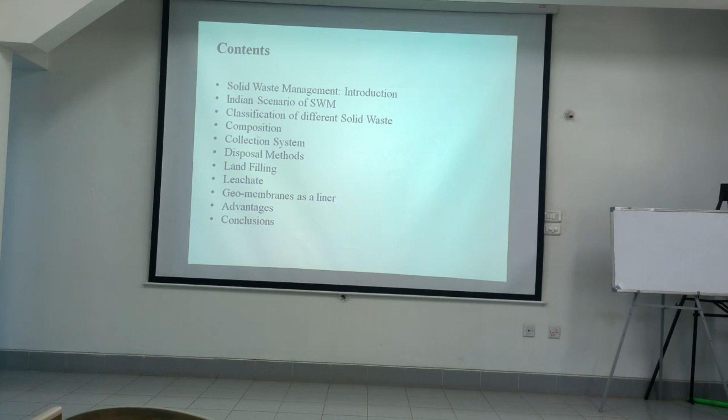So these are the contents of my presentation. A brief introduction about solid waste management and the Indian scenario of the solid waste management system. Then a little bit of detail: the classifications, the composition, the collection system, the present collection system, and the disposal methods, landfilling, leachate, geomembranes as a liner, and some of the advantages.

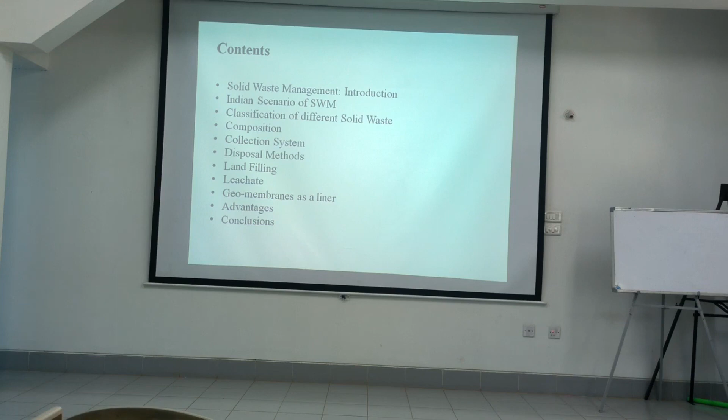Now let's see, the management of handling the solid waste is nothing but solid waste management. This is the discipline associated with the control of generation, storage, collection, transfer, transport, processing and disposal of solid waste in a specific manner, that is, an engineered manner in accordance with the best principles of public health, economics, engineering, conservation, aesthetics and other environmental considerations.

So it's not an easy topic where you can say it is a very simple method to collect door to door and throw it away from the city. We also think that the disposed waste should not harm the environment. So that is one point. Because of this, I am saying that safe disposal is a very specific manner to dispose the solid waste.

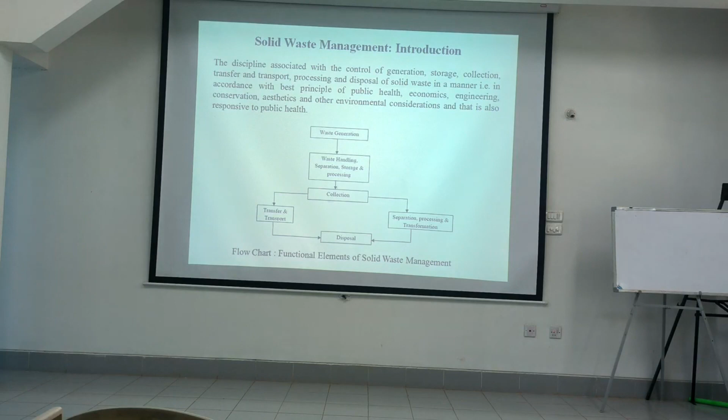So below there is a flow chart, the functional elements of solid waste management. Of course, what I told in the definition itself is represented in a flow chart. There is waste generation, normally from municipalities, households, commercial areas, institutions like that. Later there is waste handling and separation. I said that there is biodegradable waste, non-biodegradable waste like that. There is a need of separation, storage and processing. So this all comes in the second step.

Next it is collection. Then there are two: transfer and transport. Next, separation, processing and transformation. And the last point is disposal.

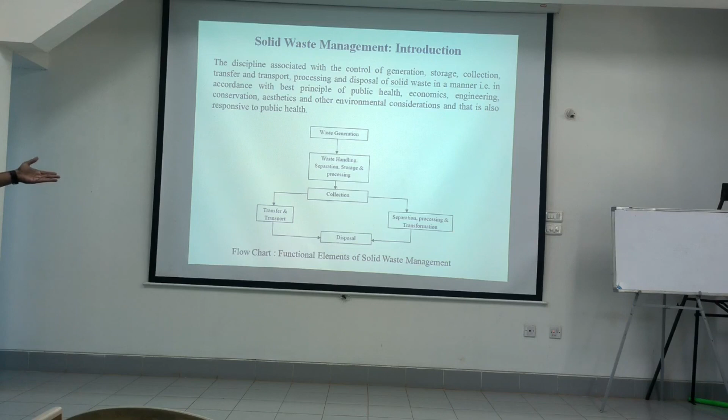I would like to share the present Indian scenario. There is a report from the Energy and Resources Institute that India generates over 62 million tons of waste in a year. So in 365 days the quantity of solid waste generated is around 62 million tons. Out of this, 43 million tons will be collected, 12 million tons are treated before disposal and the remaining 31 million tons are simply discarded in waste yards. So we are focusing on these 31 million tons, how it affects the environment, how it damages natural resources like soil, water, etc.

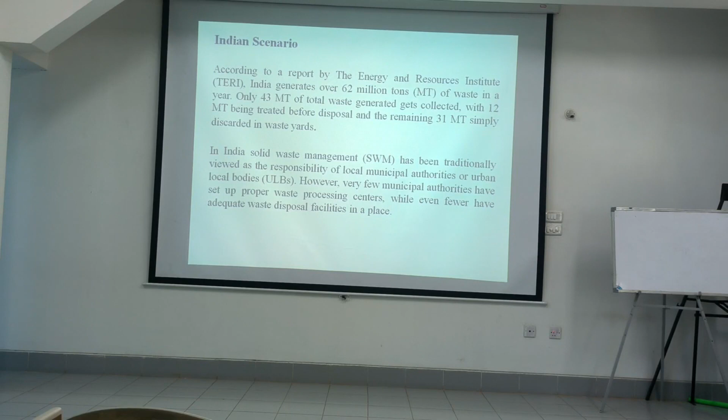In India, solid waste management has been traditionally viewed as, of course it is a responsibility of every citizen, but it is treated as a responsibility of the local municipal authorities or urban local bodies. However, very few municipal authorities have set up proper waste processing centers, while even fewer have adequate waste disposal facilities in place.

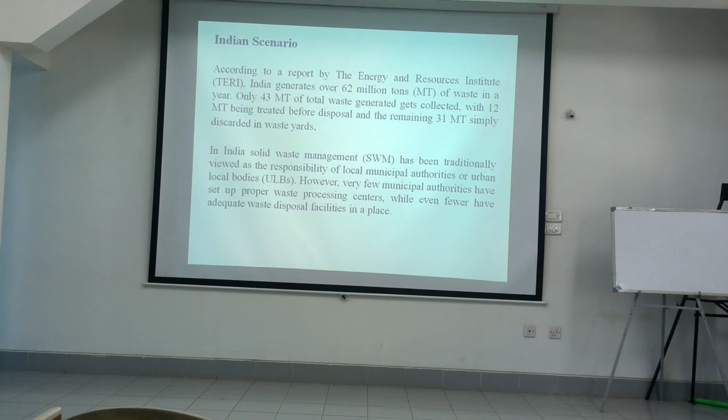We have already seen, in the early morning, motor vehicles will come and visit your home so that they collect the solid waste door to door. We are already observing this from local urban bodies to metropolitan cities. So this is how the solid waste management topic is considered in India. Next point.

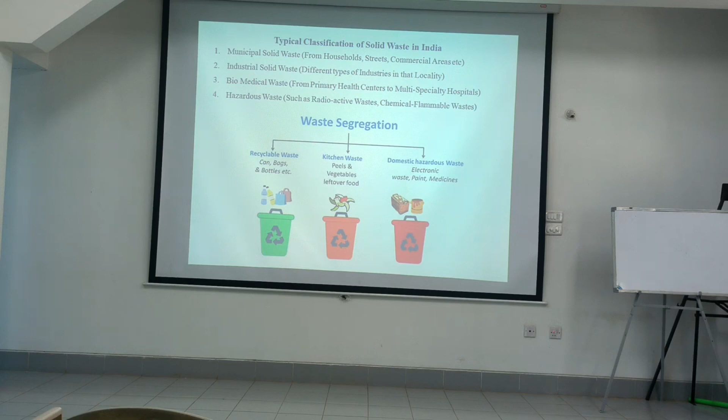So this is the classification. The entire solid waste, which is called garbage, will be classified as municipal solid waste. The sources are households, streets, commercial areas, etc. The second one is industrial solid waste. This definitely depends upon the type of industries in that locality, and some towns will not have any industries at all, where the industrial waste will be zero.

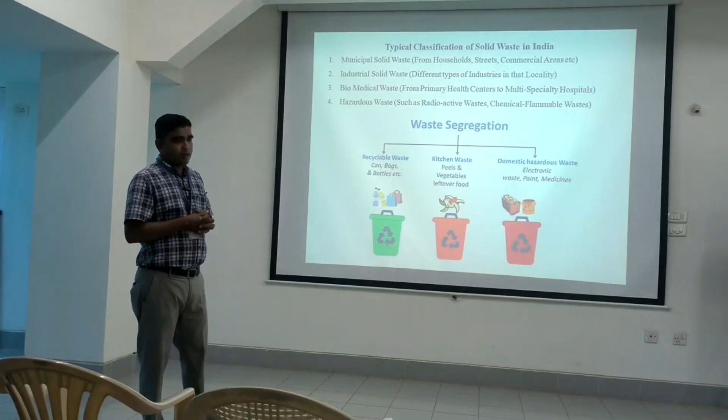The third one is biomedical waste. We know that it is generated from hospitals, from primary health centers to multi-specialty hospitals. Next, hazardous waste such as radioactive waste, chemical and flammable wastes. So these are the main components in the classification of solid waste.

So this is a small picture of how the segregation of solid waste is done at the source itself. It's a very simple task when it is done at the source itself, because later it's a very hard task to segregate all the waste when it is collected from the entire town.

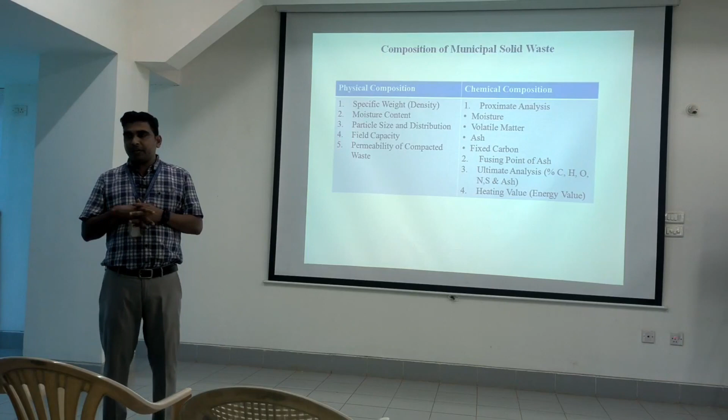So this is a little bit on the composition section. When you have collected the solid waste, there is a necessity to understand its physical and chemical composition, so that you can decide which disposal method is suitable for the collected waste. So here, the physical properties: specific weight, moisture content, particle size distribution, field capacity, permeability of compacted waste.

So these are the physical parameters, so that you can calculate the volume required, the vehicle requirement, and the area of the dumping yard. These are the parameters which help you to identify the equipment or requirements of a disposal method. So next is chemical composition.

In chemical composition, you have proximate analysis like moisture content, volatile matter, ash, fixed carbon content. Next, fusing point of ash, and ultimate analysis: the percentage of carbon, hydrogen, oxygen, nitrogen, sulfur, etc. These are some chemicals that may be found in the collected solid waste. Of course, the last one is energy value. The combustible organic matter can be converted into energy, so we can find out the energy of that solid waste in joules or kilojoules.

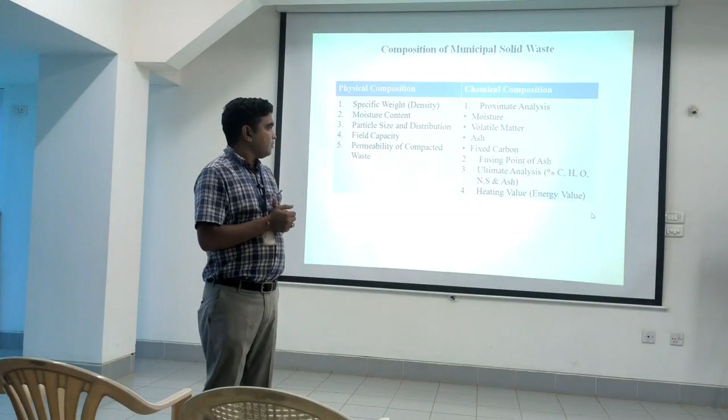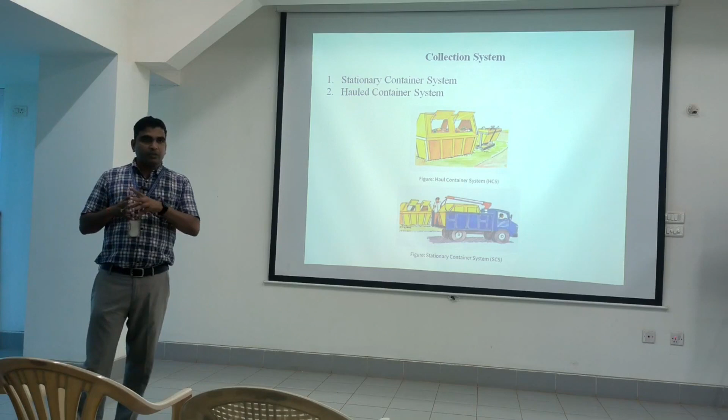In one method, the containers will be at the station itself. The name itself indicates that in the stationary container system the containers stay at a fixed position, and the collected solid waste will be transferred to the truck hauling equipment. In the hauled container system, the entire container will be lifted onto the truck and carried to a dumping yard. So there is a small difference, so that the environment will not get disturbed using the two methods. Each method has its own advantages and disadvantages.

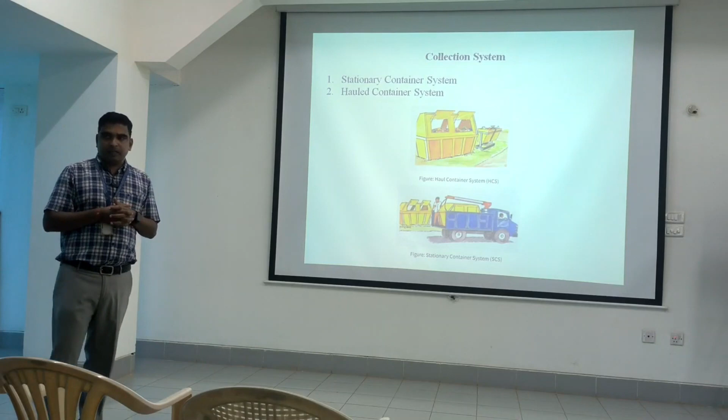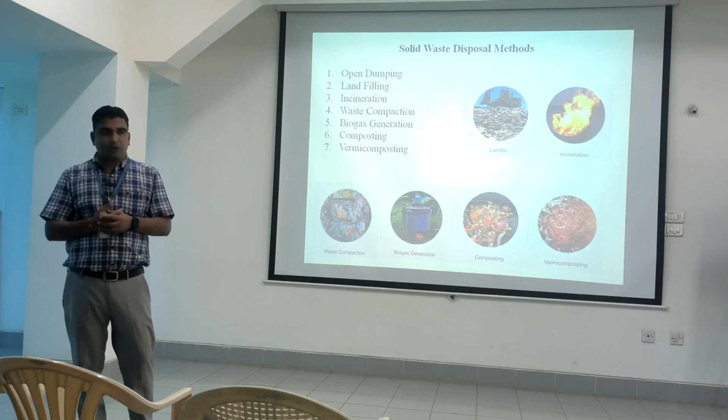So these are the different disposal methods. First one is open dumping. This is a very general method where sufficient funds are not available from the urban local bodies. The collected waste will be thrown away out of the city where sufficient land is available. Definitely it will cause a lot of nuisance, flies, insects, and it will contaminate the surroundings, of course the groundwater. Second one is landfilling, third one is incineration, fourth one is waste compaction, then biogas generation, composting and vermicomposting.

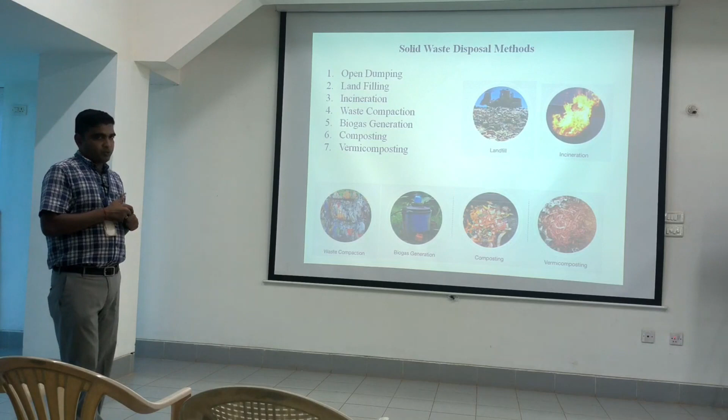Out of all the methods, I am focusing on sanitary landfilling because I am discussing the impact and usage of geomembranes in sanitary landfilling. Landfilling is an operation in which the waste to be disposed of is compacted and covered with a layer of soil. A lot of excavation and earthwork will be done, and a lot of cells of definite size will be made. Layer by layer the compacted solid waste will be placed, and a thin layer of soil will be covered over it to keep the environment hygienic.

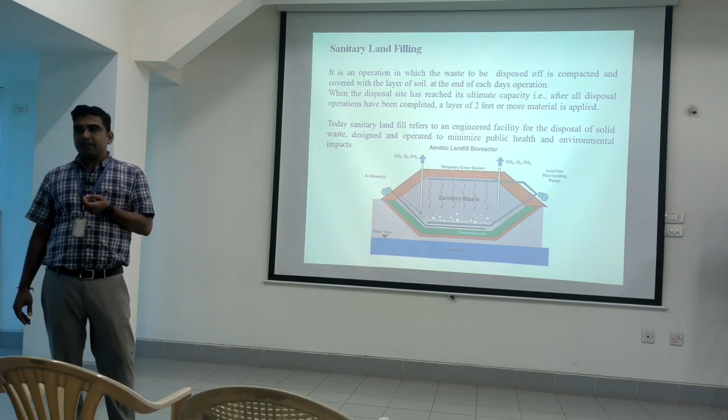Next. These are a few terms regarding the sanitary landfill site. First one is cell. It is used to describe the volume of material placed in a landfill during one operating period, usually one day.

It includes the solid waste deposited and also the daily cover material surrounding it. So there is a small pit of a definite size. Normally it will be in a rectangular shape. The length and breadth will be same for all the cells in that area. So after excavation, a layer of geomembrane will be placed at the bottom.

Later, one day operation. So in one day, how much quantity will be collected in that town? Based on that quantity, the dimensions of the cell will be made. So after filling all the solid waste, a layer of soil will be covered above that so as to keep the hygienic conditions in the surrounding.

Second one is daily cover, that usually consists of 6 to 12 inches of a native soil or alternative soil such as compost that are applied to the working faces of the landfill at the end of each operating period. The purpose of daily cover is to control the blowing of waste material due to wind, to prevent the rats, flies and other disease vectors from entering the landfill.

So we know that the flies and rats will be sources of spreading the diseases from solid waste to surroundings. So as to keep the rats and flies away from the solid waste, a layer of soil will be placed over the face of the landfill, and to control the entry of water into the landfill operation. This happens in the rainy season, when the surface runoff will try to enter the low lying areas. So this helps you to avoid the surface runoff entering the solid waste compacted layer.

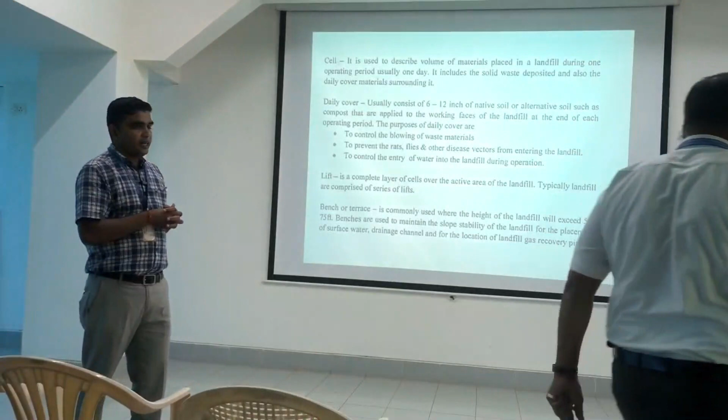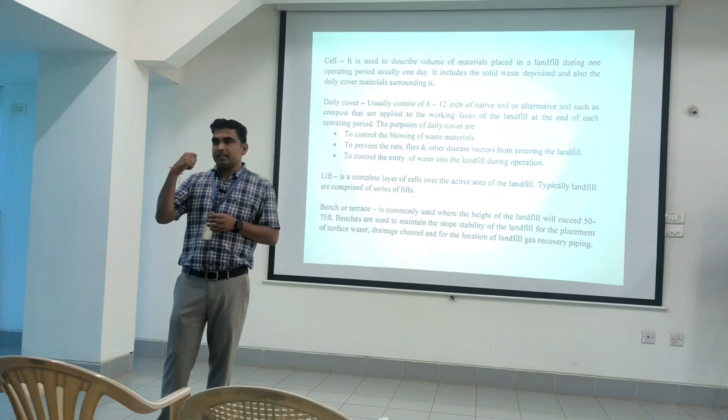So after filling the soil layer above the landfill or solid waste, there are chances of gases. As I said, CH4, carbon dioxide, methane gas will be evolved from the compacted solid waste. So pipe sections will be provided to exclude those gases from the compacted layer.

So this is the leachate. It's a highly contaminated liquid with high levels of ammonia, nitrogen, toxic components and limited biodegradability. So when the surface water enters the compacted layer of landfill, it starts to enter the bottom surface of the landfill, where it carries all the hazardous waste which is present in the solid waste, will be contaminated and reaches the low level area of the surface. If there is no liner, it will start to enter the subsurface area and groundwater.

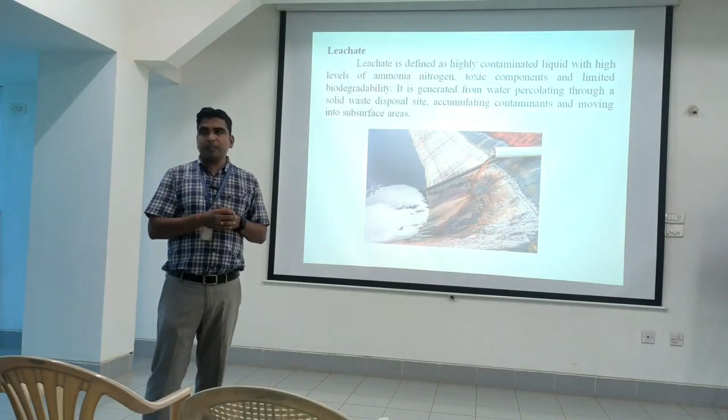So because of this reason, as I said, it is a very dangerous liquid and it has limited biodegradability. There will be no degradable organic matter present in that liquid. It is generated from water percolating through a solid waste disposal site, accumulating contaminants and moving into subsurface areas.

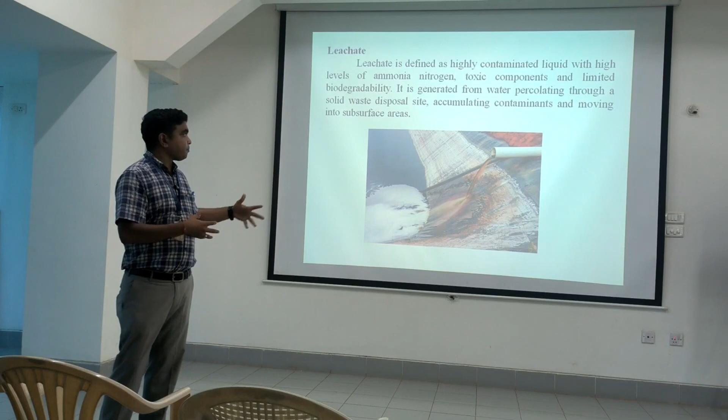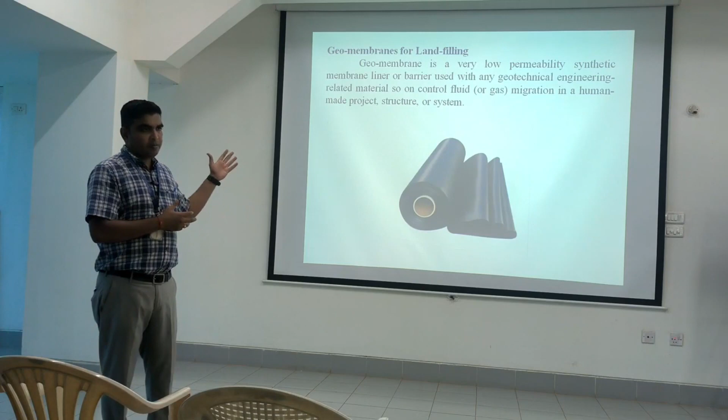So this is a typical photo showing a drainage collection system where the leachate will be collected below the landfill site and carried to the further low level areas. Next one. So this is the commercially available geomembrane layer which is used in every site. You can visit a nearby landfill site to observe these liners.

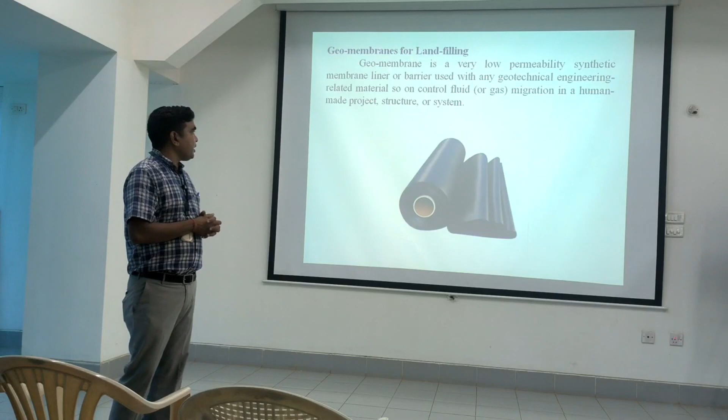So geomembrane has a very low permeability; it is a synthetic membrane liner or barrier used with any geotechnical engineering related material, to control fluid migration in human made project structures or systems. So why do you need geomembranes in landfill projects? There are some advantages to use the geomembrane layers.

So the membranes will have physical and mechanical performance, non-toxicity, long service life, one-time installation. You can get the benefits for at least 50 to 60 years. The service temperature range is between minus 70 degrees to plus 110 degrees Celsius. It can be used even under bad conditions. No matter high hills or desert places, the geomembranes can still keep a good performance without cracking.

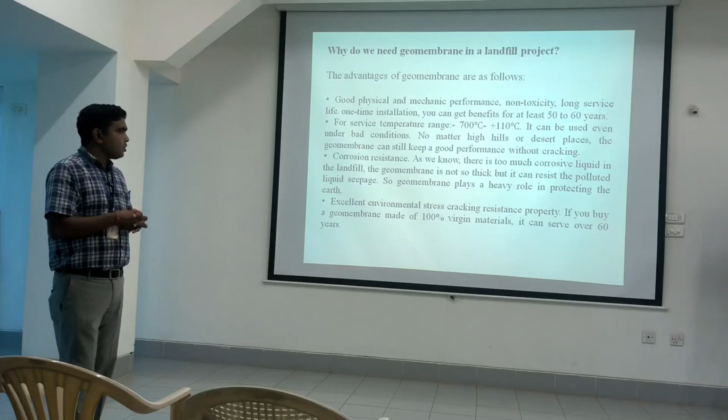So one of the properties of the liner should be its crack resistance. Under pressure, if it cracks, definitely the leachate starts to enter the subsurface areas. Corrosion resistance: as we know, there is too much corrosive liquid in the landfill. The geomembrane is not so thick, but it can resist the polluted liquid seepage. So geomembranes play a heavy role in protecting the earth.

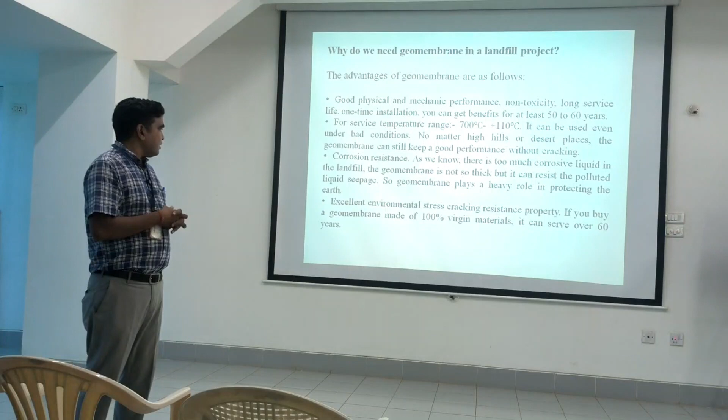Further, the excellent environmental stress cracking resistance property. If you buy a geomembrane made of 100% virgin materials, it can serve over 60 years. So these are the advantages.